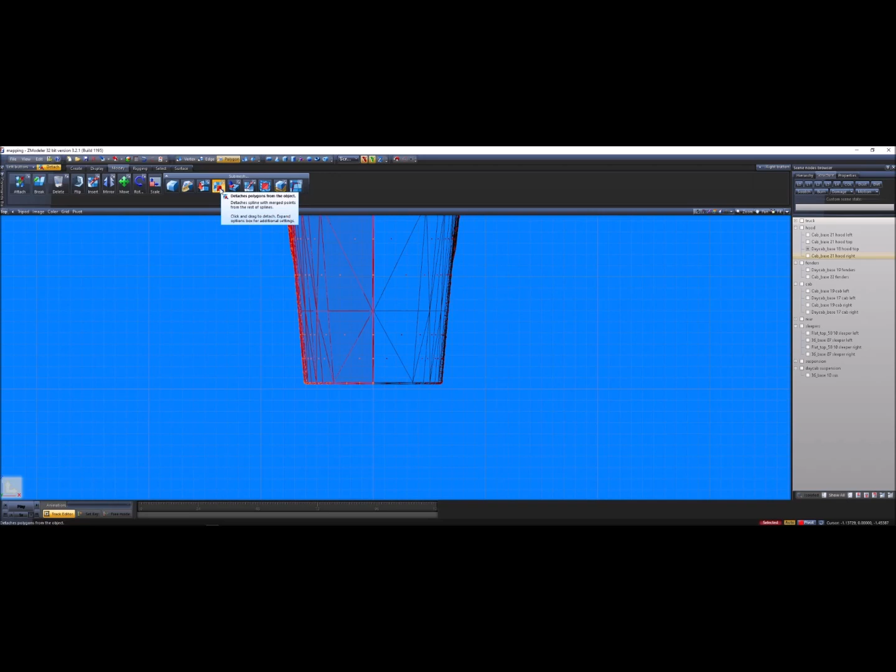Thanks. Go ahead and click it, then select the top half. Alright, there we go. Make sure under submesh you do this, it detaches polygons from the object. Click that, activate it, click your polygons, and that separates it.

So now that's how you do the left and the right. But what we also need to do is get the top separated. So what we'll do now is go here, select them both, polygon mode also.

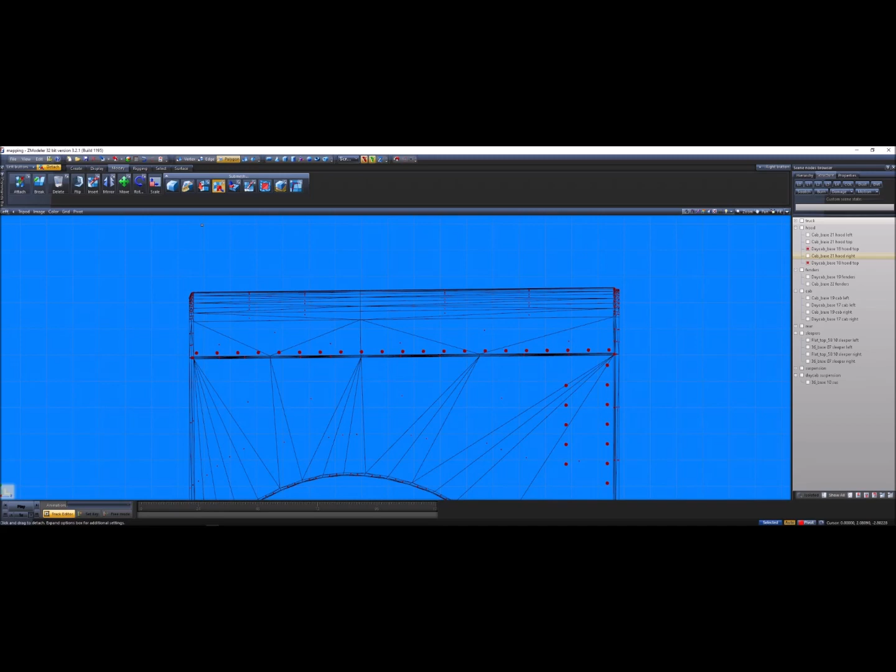An easy way to do it actually, let me show you. You can go up here, go to select, and click separated. This doesn't always work, but usually if it's a set of polys, it'll select them all. All you have to do is right click, and there you go.

We'll go ahead and see what that did. So I hit the detach button, and you can see that's done the top part of it. That should be good enough, so I'll go back to the top. We need to get these also.

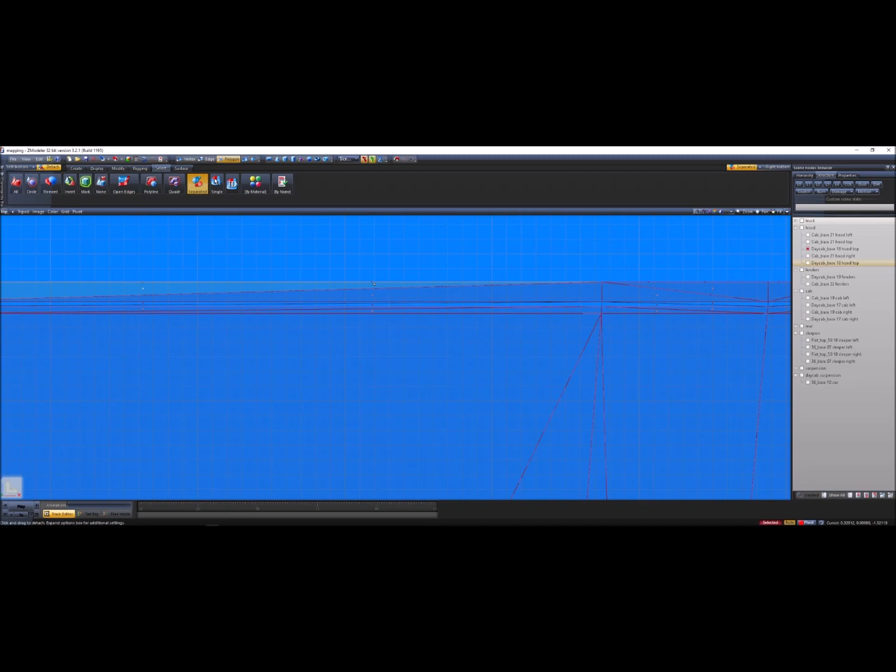Let's go ahead and right click and see what all it does. You've seen it misses some of them, so I just have to go through and select them.

So now that you have this selected, go ahead and go back and detach them. So the top part on the left side's done. Now we gotta do the right.

Alrighty, now it's detached also. So there we go, that's what we basically wanted to achieve right there, is everything separated. So now that we have these two top pieces, rather than messing around with them trying to get them all mapped at the same time, we're just going to go ahead and attach these two together. And boom, that is how we get the top, and that's how we get the hood separated.

And you can see I did that with all of them. I went ahead and just kept the fenders as is, because it makes it easier to paint them a color rather than attach to the hood. You can separate them, put them in its own box, and it makes it a lot easier.

See on the cab, I've also separated it. I didn't do the top on this one because you can't really see the top. In the interior view you can see the hood, so if the metallic flake is all messed up, it's really noticeable. But the roof, you're really not going to see it.

So yeah, you can see right there, I've went ahead and separated everything. And with the sleepers, I've also detached the back, so that it makes it easier to do the wraparound paint, and if I want to do a custom logo or whatever, it'll make it a lot easier.

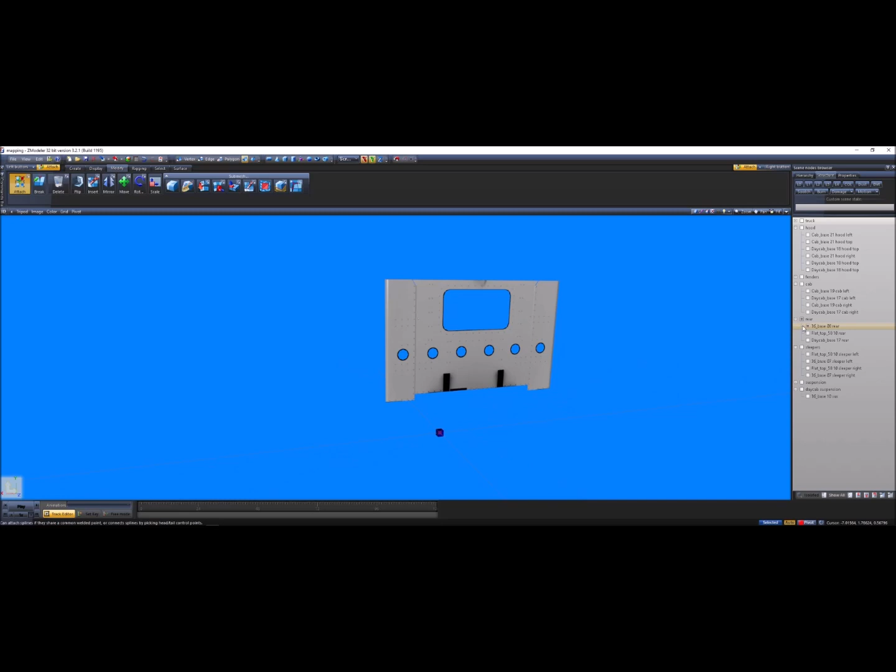So now that I've got that all separated, we'll go ahead and start mapping it. Typically, any truck you do, you want to do all of it at the same time, because it'll make it a lot harder if you've mapped one already, and then you're going to go back and try to map it with the other one. If those stripes are off by even a tiny bit, like say you're doing a stripe paint job, or any paint job really, if it's a little bit different, you'll definitely notice it.

So the problem with Zmodeler is in UV mapping, it does not like to have multiple things, unfortunately. So it's going to take quite a bit. It took me, I don't know, 20-30 minutes trying to get this truck because it's very high poly. And even if you have a good computer, it may still be hard on the program just because of the program itself, not because of your computer.

So now we'll go ahead and activate everything. What we'll want to do is go ahead and left click it. We'll do one sleeper just to make it easier.

Go ahead and get rid of the day cab. We'll do the 36-inch.

So now we got the 36-inch all done up. We'll go ahead and select it all, go to surface, and then go to edit UV. Go ahead and do that, and we'll click it, and you'll see this.

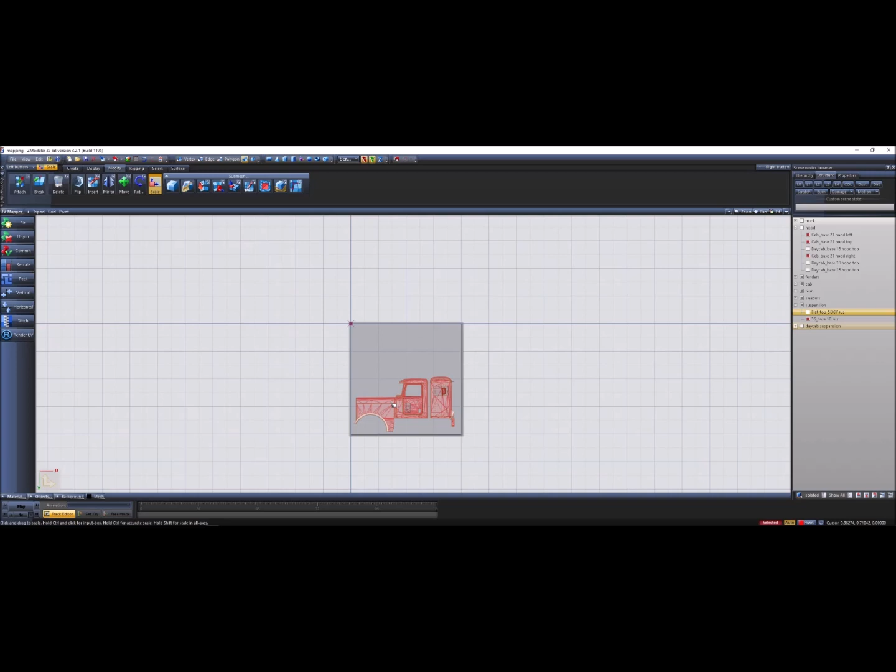We'll try to scale this down a little bit because we got to make room for the day cab, the back of the sleeper. So we'll scale it down about, let's try 60%. That should be good enough.

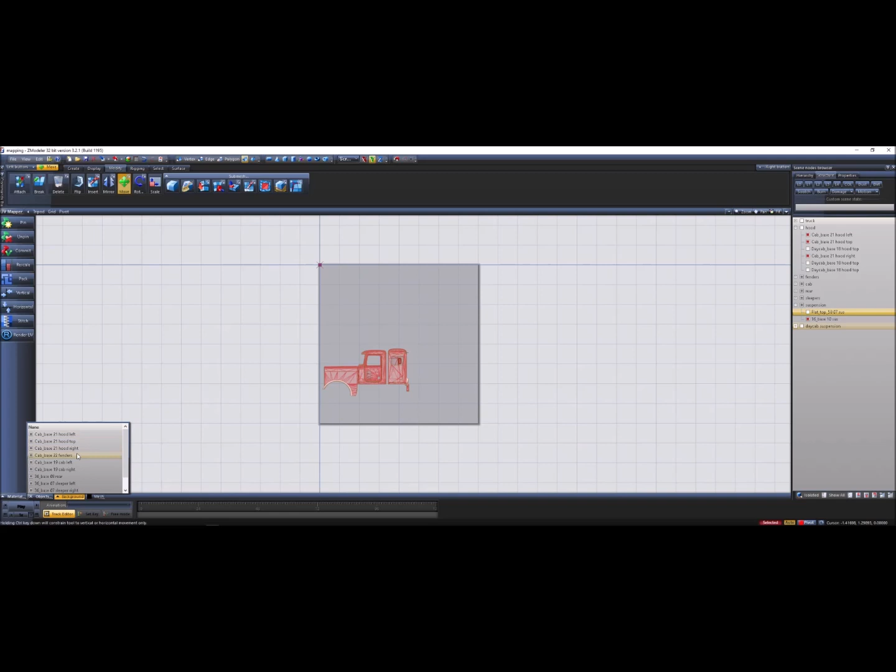Now before we get any further, I'm going to check to make sure that the rear has transferred over properly, or else we'll just have to restart. So we'll deactivate all of them except for the rear. Go ahead and select it. We'll rotate it.

Okay, so sometimes it won't go into UV mapping properly, and if it doesn't, you'll want to check your rear and left and right, because if they don't, sometimes they'll show up as a flat plane no matter which way you rotate it, and you won't be able to map it properly.

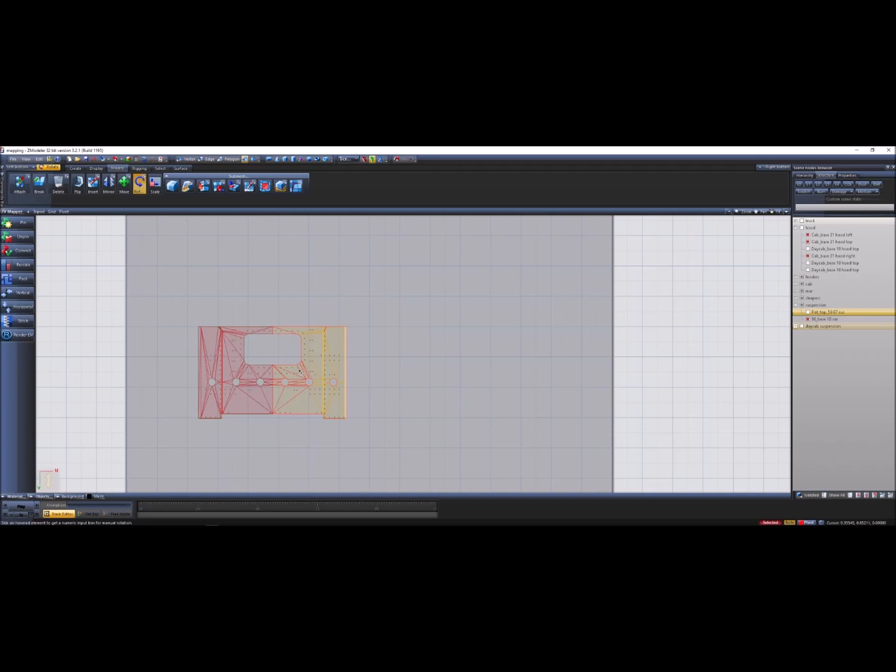So now that we checked to make sure that was mapped properly, we'll go ahead and activate it all again. Got it scaled down, we'll move this down a little bit. Alrighty, and there we go.

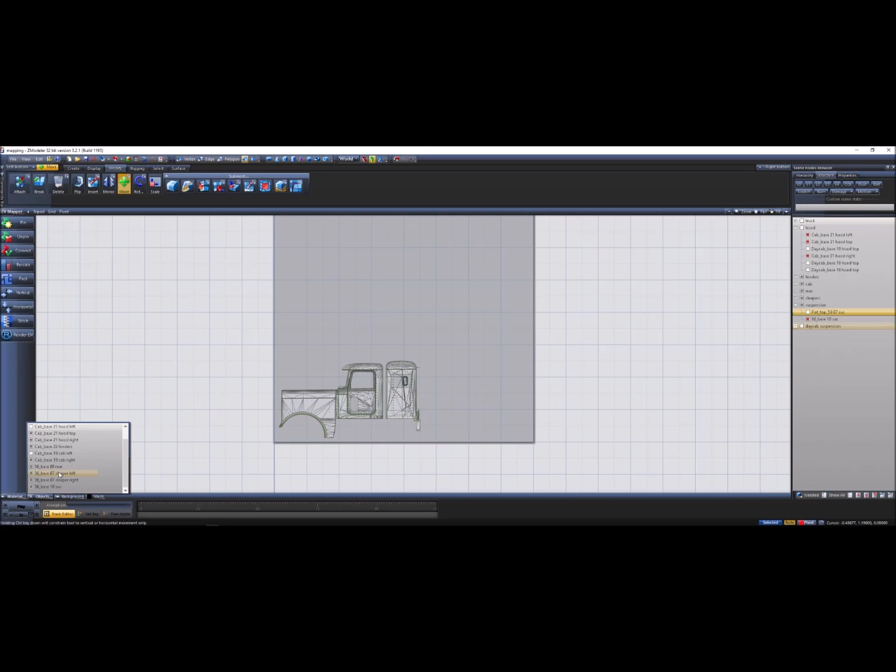So now what I'm going to do is deactivate the left side, because this will be where we're leaving the left side, and we need to move everything else. So I'll get rid of the suspension and the rear. Basically what we're going to activate right now is the right side. Get rid of all that. And now the right side is activated.

So we'll go ahead and select it all. I'm going to rotate it, and the axis you want to use is the x-axis, if I remember correctly. We'll go ahead and do 180. Hold shift when you click the object and this will pop up and let you do specific results. So we'll zoom out of here, and there we go, so it's rotated.

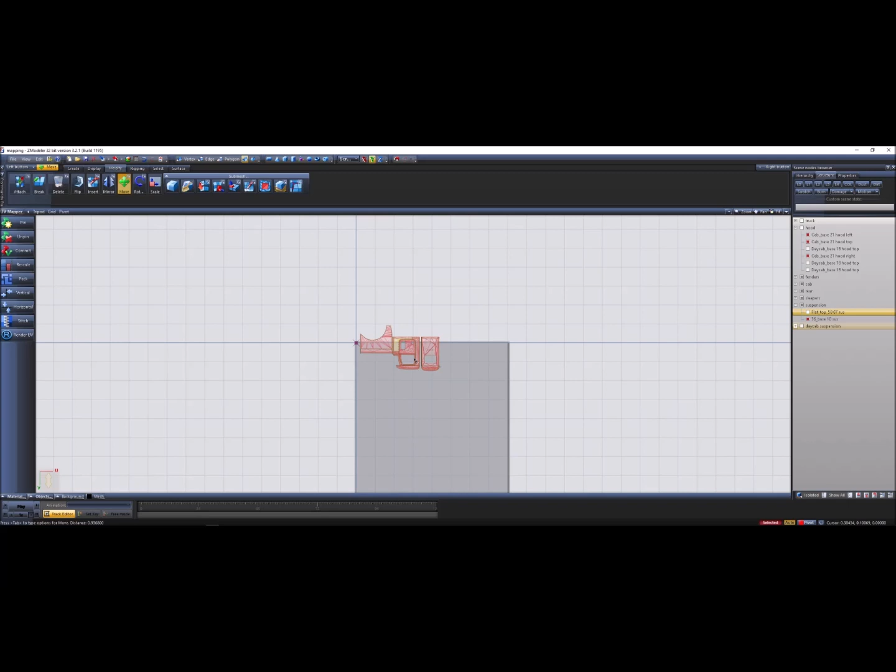So now it's rotated, and you can eyeball it to try to get it to be the same spot as the other one. For when you're doing paint jobs, you can just mirror it. So you can see about the length of it right there. We'll do that too.

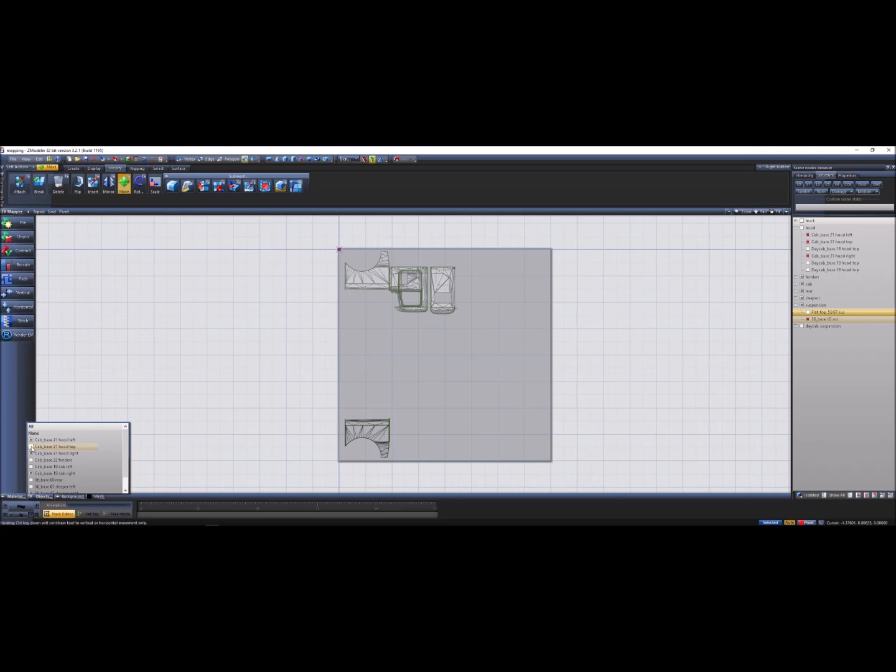Alrighty, so now we got the right side up there. We'll go ahead and do the top. We'll activate it to the left side just so we can see where between we need to put it. Keep that, we'll keep that.

There's the hood, and we'll go ahead and do the fenders also. Now before you select these, make sure you deactivate the left side just so you don't select any of the polys.

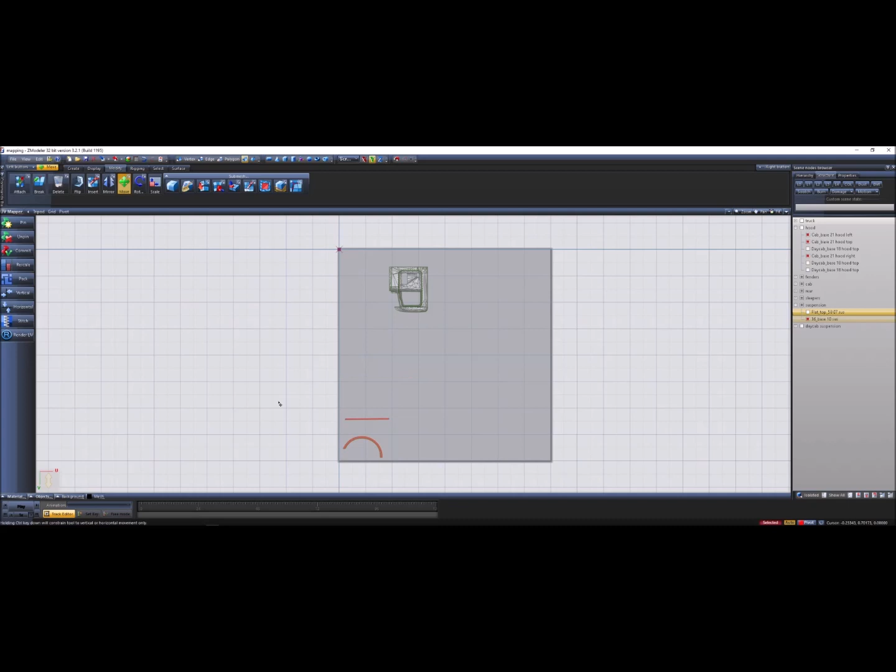Alright, now we'll rotate this. We'll do the same, we'll rotate on the x-axis, but this time we're only going to do 90. Oh, selected the wrong part. Let's see if I can get that selected again.

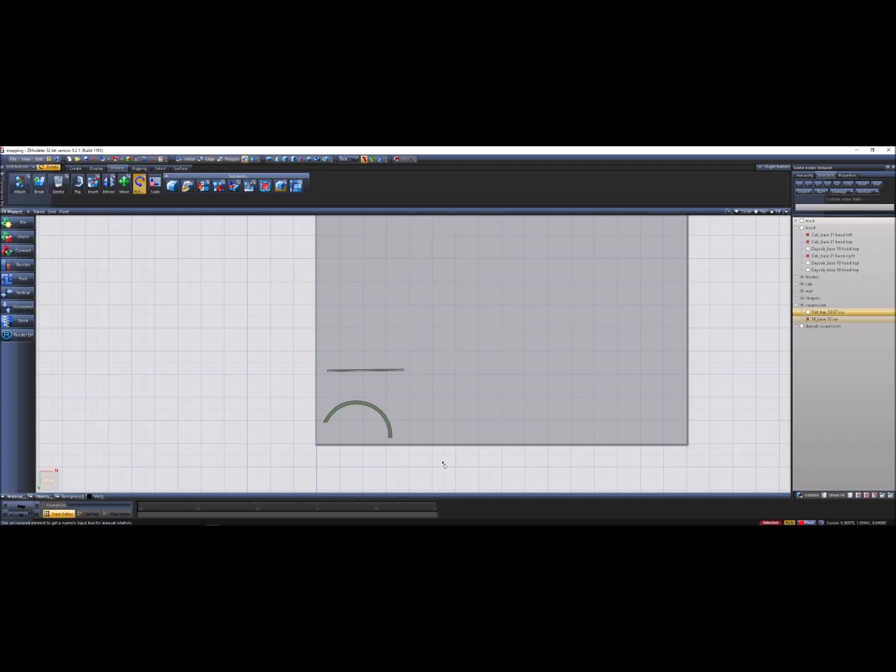It is not wanting to play nice. There we go, alright, 90. You'll see rather than rotating it fully, it has only rotated 90 degrees to where we can see the top of it. We'll go ahead and move this down.

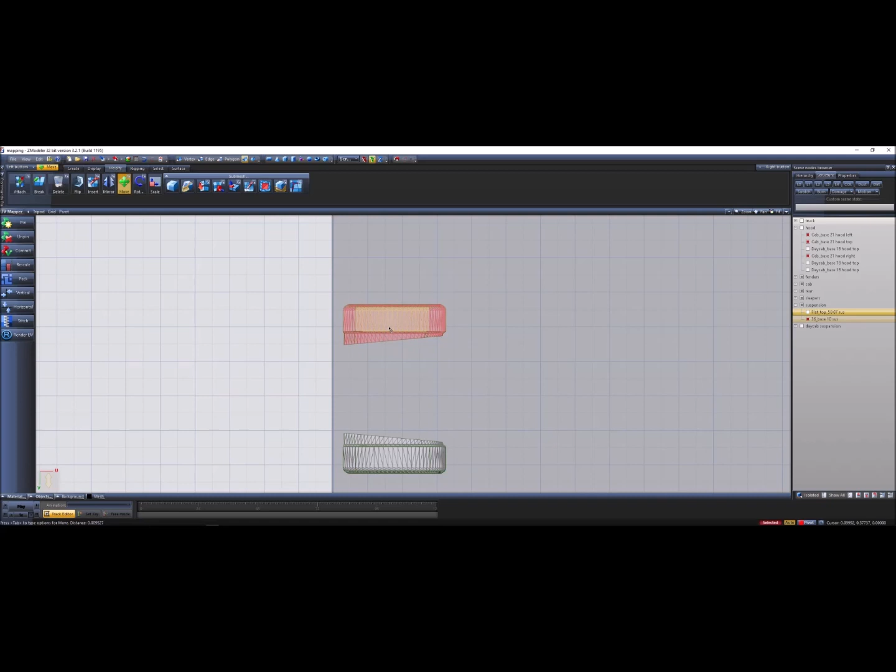Activate everything so I can see where to put it. Doesn't have to be perfect, but there we go. Now I'll go ahead and deactivate all of it, and we'll activate the fenders again, because I want them to be a little bit separate from the hood so it makes it easier to paint. So I'll go ahead and move it about 10. I'll do the same for this one. If you want to pop that up as you're moving it, just hit tab. We'll go back, check the hood, and there you go, separated.

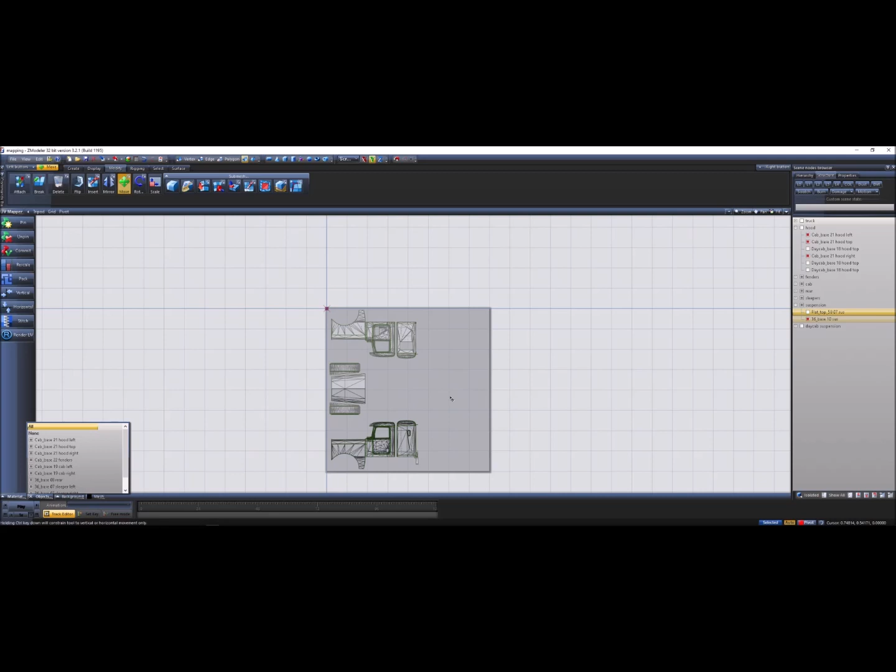So now I got the left, the right side done, and the hood and fenders done. We'll go ahead and work on the back side and the suspension. So we'll deactivate all of this.

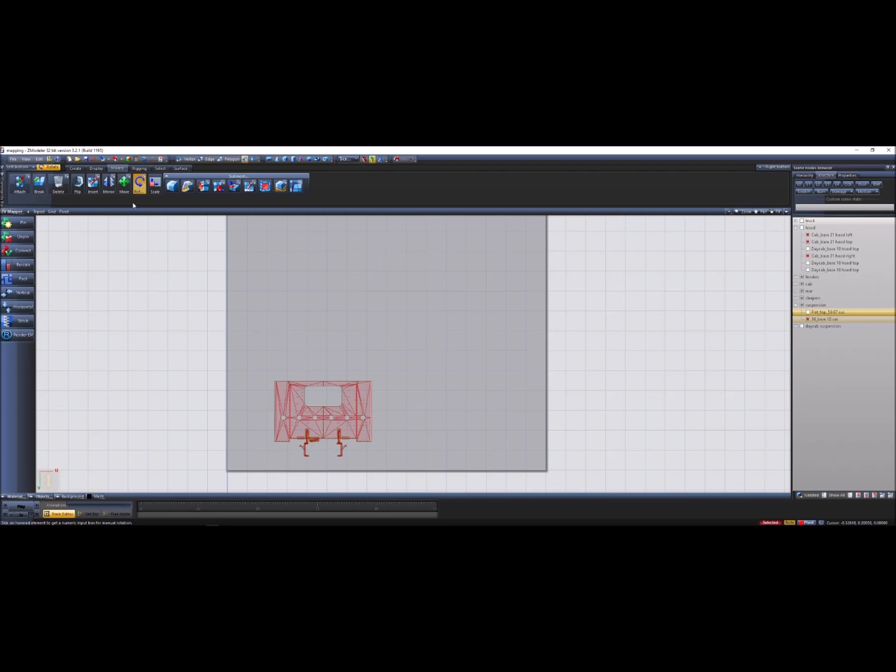Go ahead and outline this, and we're going to rotate it. On the y-axis, we'll do 90 degrees also. Go ahead and move that to the left. And you want to make sure it's facing the right way.

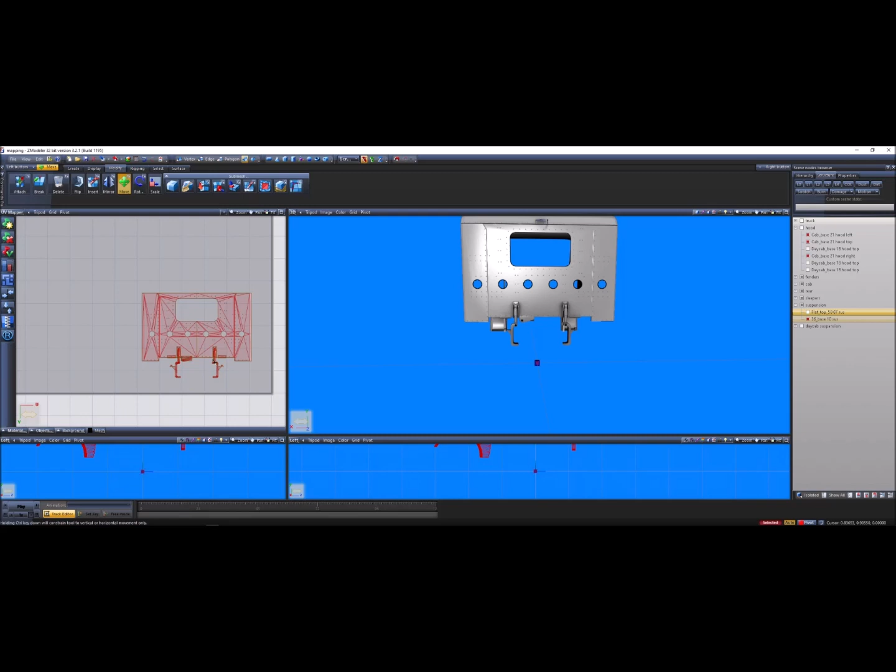If I look at this, you can see this portion right here matches this. You don't want it to be on this side or whatever, because it'll be mirrored if you're doing anything like text or whatever. If you're doing stripes or whatever, it's not going to matter, but if you want it to be specific, make sure you're mapping it correctly. You don't want to rotate it negative 90 degrees or anything like that. You want to make sure you do positive.

So we'll go ahead and activate all this, make sure it's all lined up. And it looks good.

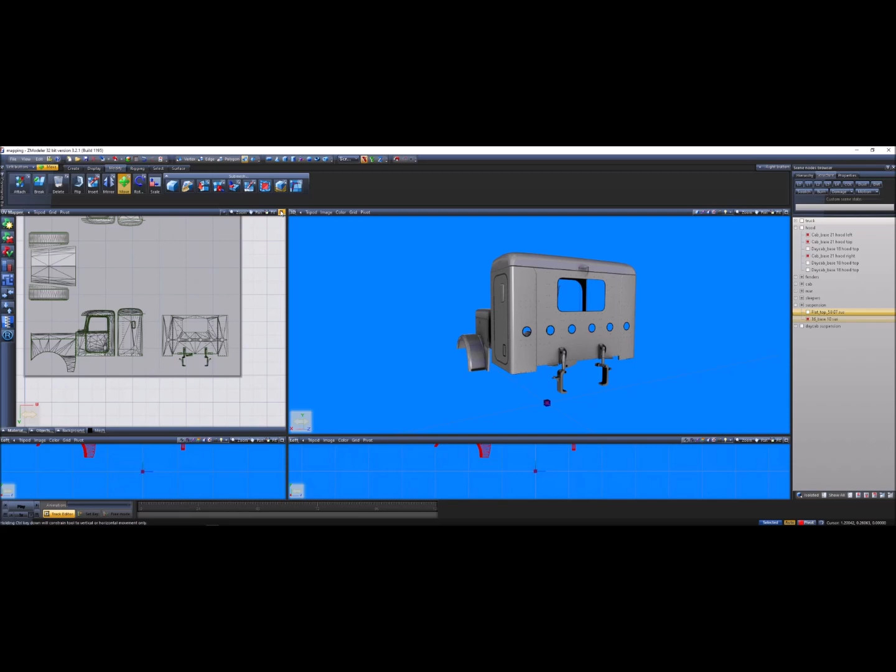Now say you're wanting to map a part to a template that's already been made. Well, what you do is you go up here. We mapped it to the UV glass, so I'll go back to the UV mapping real quick. It's probably disappeared. It did. Okay, alright, so say this hood, it's not mapped yet, but I already have the cab mapped.

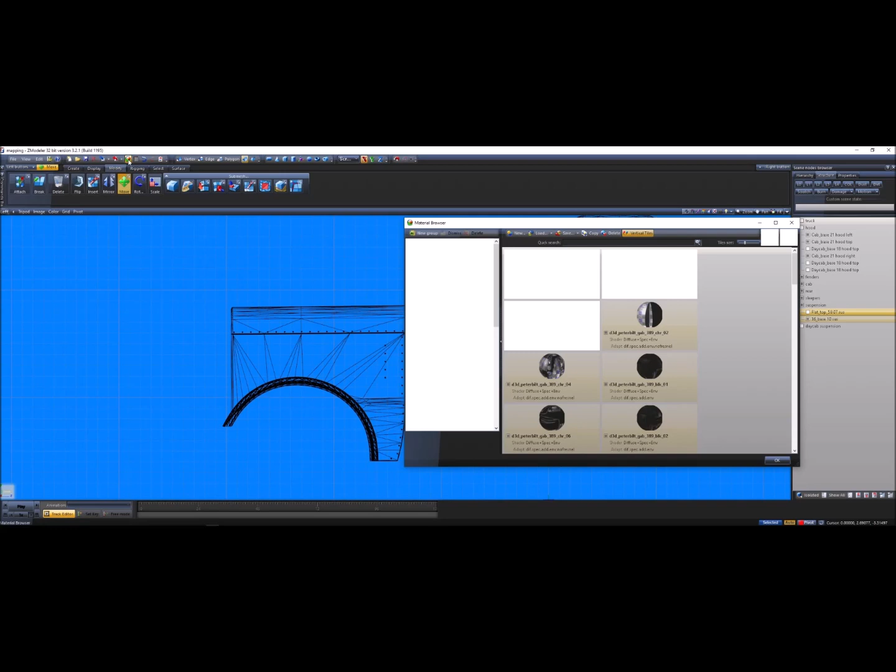Well, what I want to do is find out which one's mapped to, or find the material that I'm going to assign it to. This is only temporary, so go ahead and go to Material Properties. Let's do this - if I go to Properties, you can see right here, multiple materials. So we'll go ahead and select just the fenders and see where it's mapped to. So it's mapped to the AO4.

So what I'm going to do in here is go here and type AO, do the 4 just to find it. See if we can find it. So there we go, it's right there.

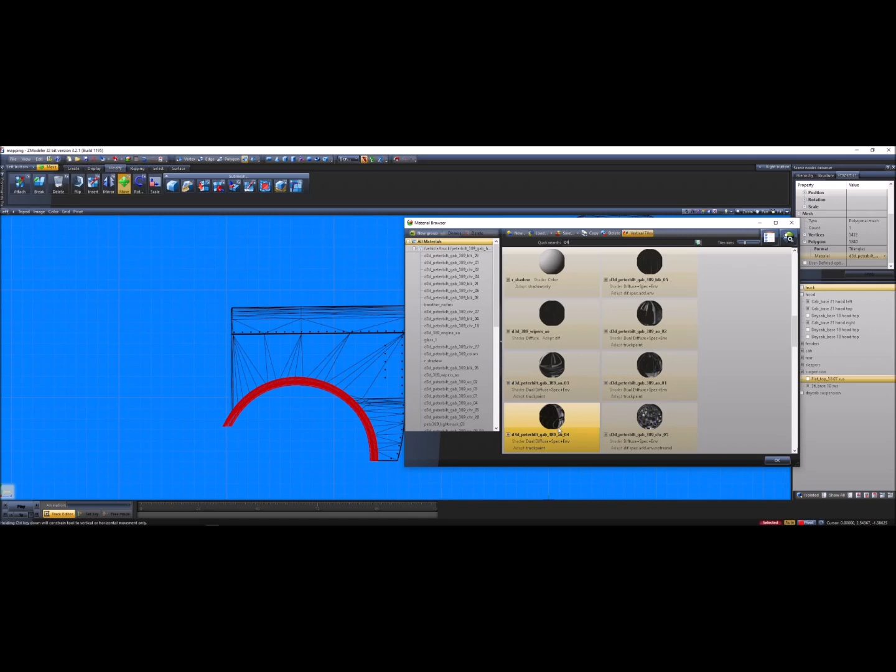Like I mentioned before, the way it's set up is usually empty DDS. If you want to figure out where to map your skins and templates to, you just go into here, go into wherever the truck paint's at, and go to Detail 2, or wherever your empty DDS may be. This is how you figure out what you're going to map to. Sometimes people put this to UV channel 2 - that's the old way of doing it. If it's updated to the newer game, it'll be UV channel 3. So you want to go here, click Detail 2, look where this is at. That's where you need to map to.

Anyways, you want to go to Texture Map. If you want to map to a template that's already been made, click that. And I'm going to click Add, and you can see everything right here - these are the templates. So I'll go ahead and select 36. And there we go, I've added that to it.

Remember what you were using prior to doing this - like I said, this empty was attached to this one. So make sure after you're done, you put it back, or else it's going to export incorrectly. So I've done that. Now I'm going to go back here. We'll go ahead and select all of this, because I want to map it to this. Click Edit UV, we'll go ahead and click this.

And we can generate new, so I'm going to force it onto wherever I've attached that to. So we did this one right. There we go. So AO4, I'm going to force it to that, and make sure it's the same channel. Generate new, click that, now we'll go check it out. And you'll see, this is a template I've already made for the truck. I've already mapped it, but this is what the template will look like.

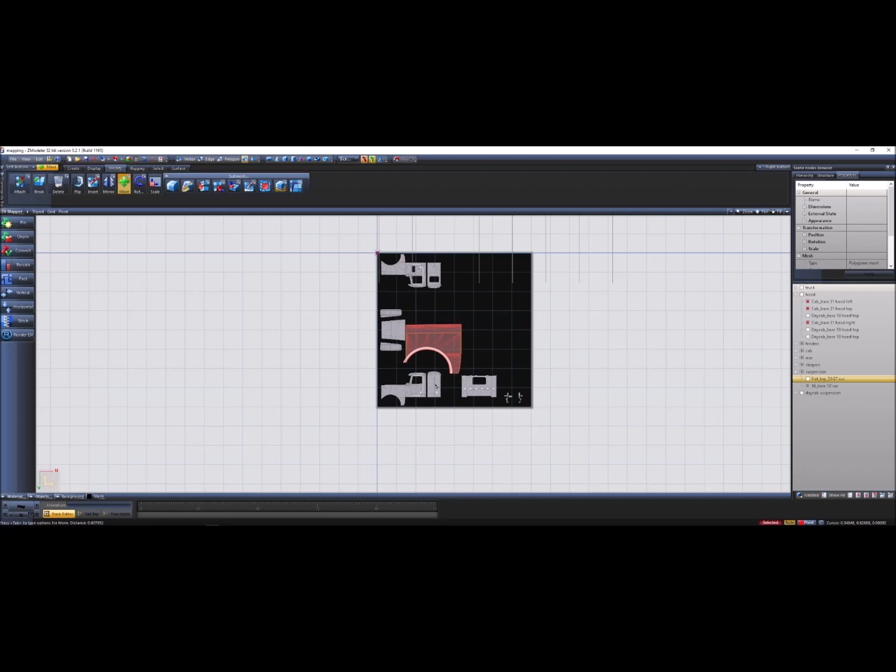So say I want to try to get it to this. The way I usually do it is I'll move it down there, get it to about the same size. This would be easy to do, but say the hood wasn't there already. You're going to move it down there, get a rough idea. If you can use two views and look at it, you can compare where it all hooks up, compare the sizing, and that'll help you get it lined up perfectly. So obviously it's not lined up right now.

Say I can't do that, it's getting too complicated to where it's not fitting properly. Well, you can do something else - instead of using the template, I can use a paint job, which will help a lot with lining up stripes and stuff. So I'll go ahead and go in here, and we'll use this one. I already had it assigned, but I might as well show you just so you know. So now that that's up, we'll go back here.

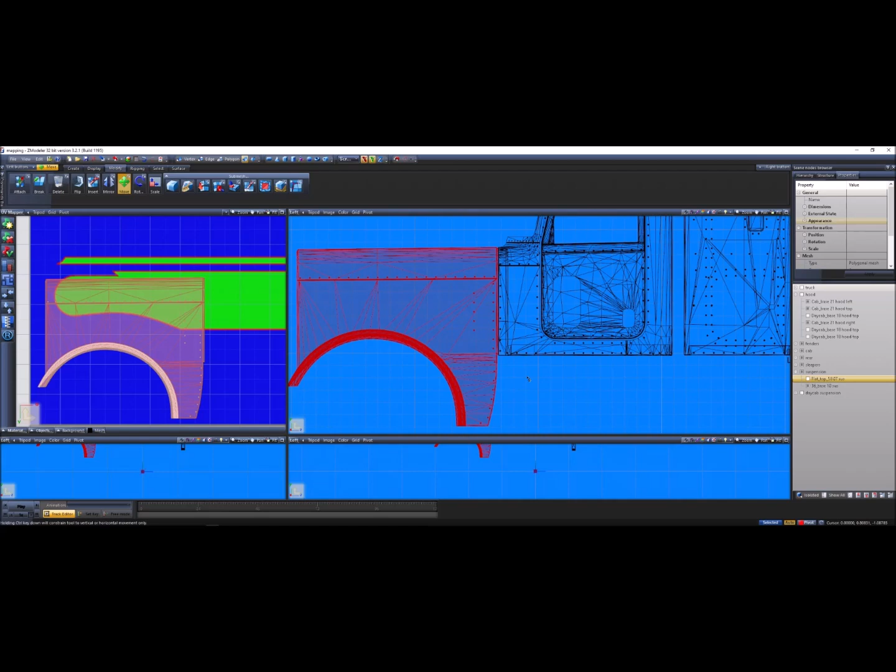If you need to, it can be a pain. So if you're going to do UV mapping, typically save your project beforehand, so that if you need to, you can take just the cab and hood and all that stuff itself, detach it, export it, and then reattach it to your old file, because sometimes you'll mess up the materials and stuff doing this. So as you can see, even though I have it assigned to that, all of this stuff is assigned to its own thing, so I can't really tell where the stripe's going to line up to be.

So what I want to do is select all of these, go here, and assign it. Now this is the fun part, because you can't see the material - I need to move it over. There we go. No, right, you can't still see it though. And that's the problem with this. So we'll go ahead and figure out where this is located.

So what I'm going to do is select this since it's already assigned to it, and see where it's showing it right there - the Bub Pete 389 glass mask. There we go. Alright, so we'll attempt to get to that one. Where was that at? Right there. So we'll try this one and see. Might not be it. Maybe not. Nope, okay, so we'll go down again. Possibly, yeah. It does not want to play nice today. See, maybe it is all. Nope, it's not - still not assigned to it. Okay.

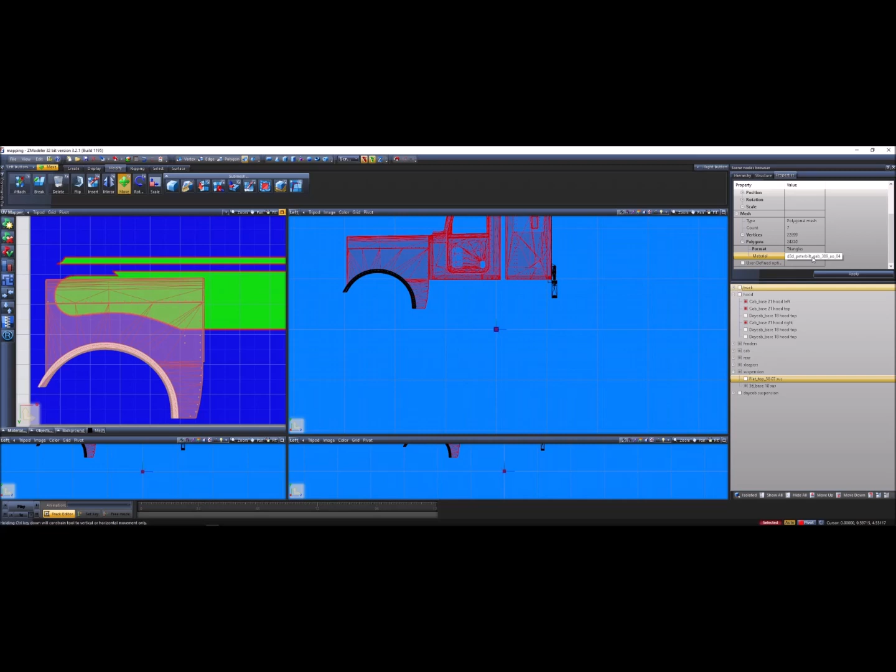Oh, there we go, and you can see that that's affected. So what I'm going to do is disable the AO real quick, and you can look at it. Make sure you keep the name. You typically won't run into this error - usually if people AO bake something, they use the AO bake on all of it, and it just so happens that this truck has everything separated. So go ahead and click that off just so it's not showing this weirdness on it. There we go, so you can see now I can see the paint job.

Alright, so after that, we're going to go ahead and click this out so I can see what size to do. What we'll do is scale it down. And you can see as I'm scaling, it makes it bigger, so we want to make it smaller, so we're going to scale it down a little bit. I usually only use this method if this truck didn't already come with a template, which it's not hard to make a template at all. But if I can't get it just right and I want to make sure it's perfect, then I'll go ahead and use this method.

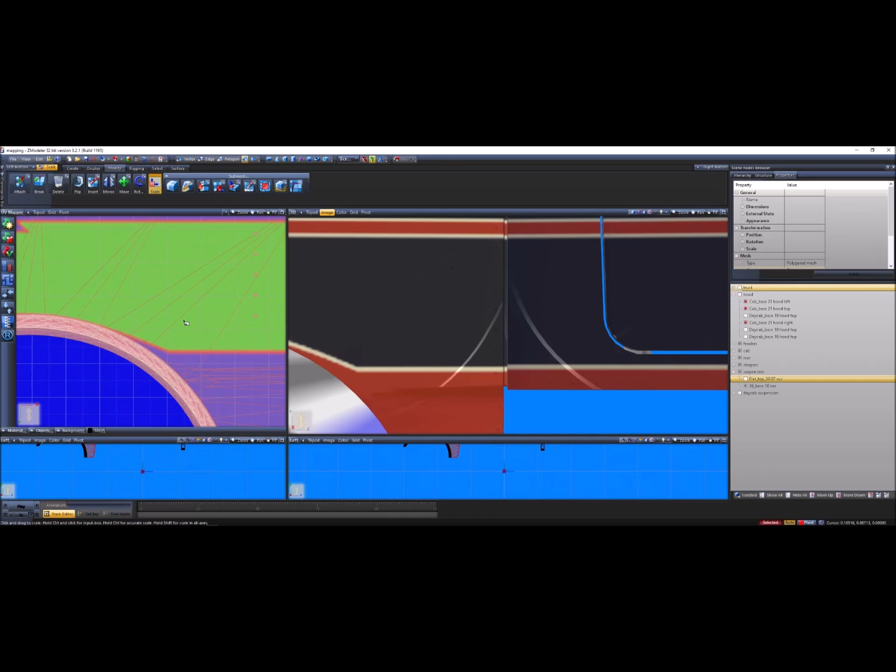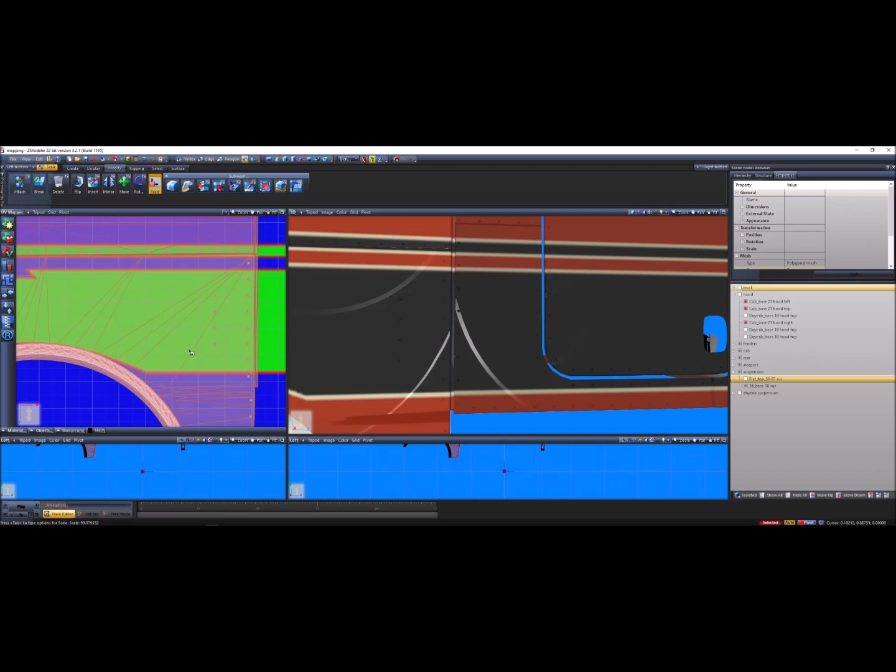So you can see that's a little bit off, so what I'll do is go to the top and click X, which puts this right here, and that's where it's going to scale it from. So go ahead and do this a little bit - just a hair. You can zoom in and it'll do it really slowly, which makes it easier to get more precise results. And there you go - that does look a little bit off too, so we'll go ahead and move that down. It's just basically guessing, and it'll probably mess that up a little bit, so it's just working back and forth basically. And that's good enough - so now we have it mapped, and then we're good to go.

I'll go ahead and show you how to make a template also. So say I already have everything mapped, I'll go ahead and open it - open up the old one.

So I want to make sure, say I'm doing the day cab. Well, first off, I'm going to select all the day cab parts. Go do this, make sure you got everything activated.

And I'll select it, go here. And instead of hitting generate new, make sure you hit keep old mapping. And then we'll force it to any of these, it doesn't matter what it is, but we'll force it.

Go ahead and do this. Click keep old mapping, we'll try again, see what happens. There we go. Alright, you can see, I'll outline it here since the color - you can see everything's already mapped. So what we'll do is, after you've done that, got it all set up, you'll click this button right here, Render UV.

So say I've already got the hood, we'll do the hood this time. We'll edit UV, go here, keep old mapping. It is just not cooperating today.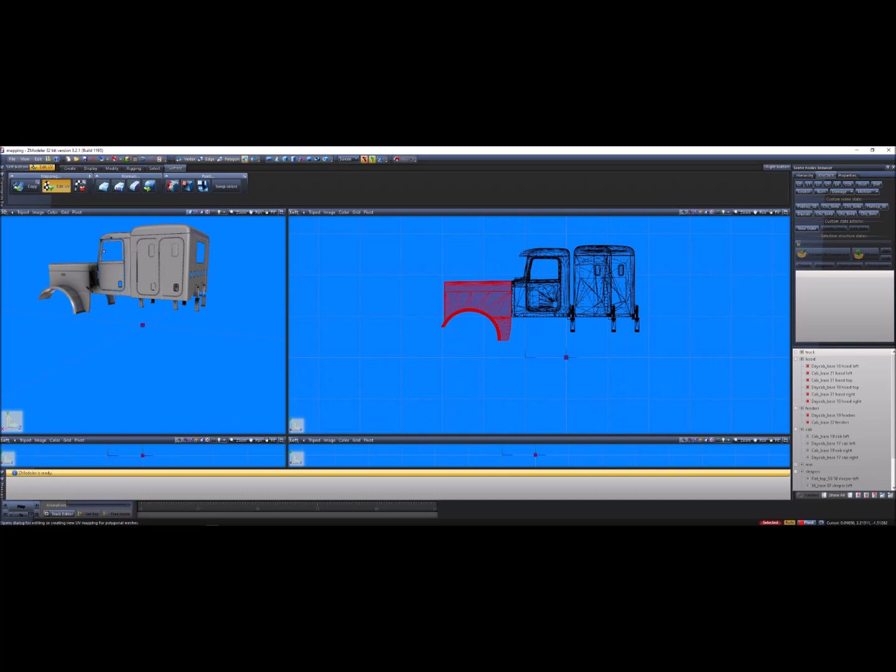There we go, try this again. Click Render UV. Make sure you have it set to wireframe UV - that's how you get your template.

So I'll zoom out, you can select the size right here. I typically do smaller one - if you do higher, just like just now, it'll try to crash ZModeler. This program is good for modding, not so good for anything else.

So go ahead and click render right there, and boom, it creates your template. And then we'll try it again, see if it does it. Day cab.

Alright, so put everything on there. We'll try this again, and you can select whatever texture you want to on the background. Typically I do a color that is very contrasting to the white, just so if I delete it, it's not going to delete the template itself.

Let's go ahead and click render. There you go, you click save. You can save it as a BMP or a DDS - I usually save it as a DDS, so we'll try the test DDS.

And there you go. So if I go back here and select this, and I'll do, let's just say, pick a random one. We'll click add and go back to the main screen. There's the test DDS - you can see it's red from where I selected the color, and it has the truck right there.

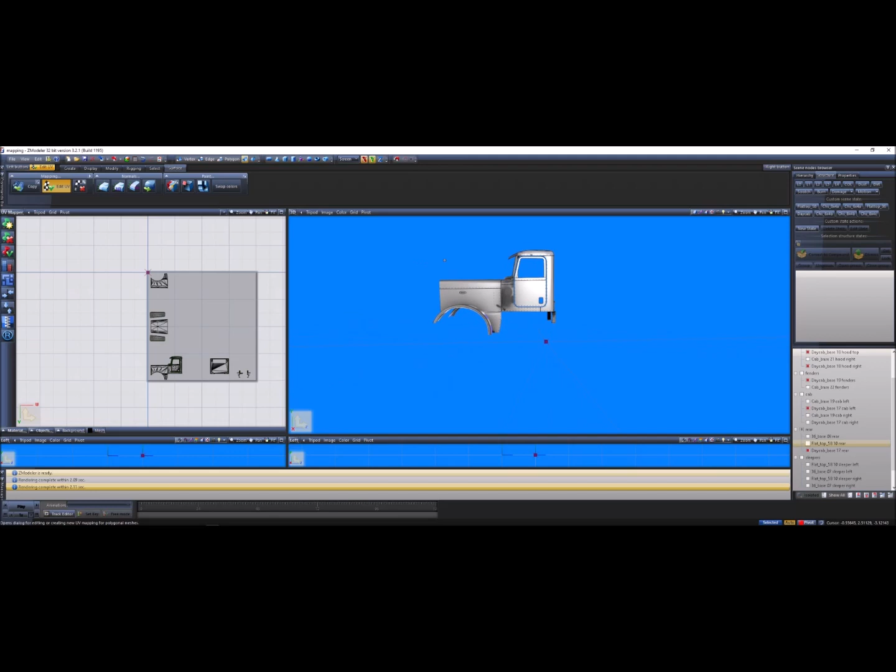And that's pretty much how you do it. I mean, I may have missed a step or two - if you watch the video back, you'll see some stuff, but I think it did pretty good on the basics. It's not too hard, it's just when you hear UV mapping, it sounds bad, but it's not really that bad. It's easy, and once you learn it, it opens up your world a lot, because this will allow you to add new parts, will allow you to create new parts, and you can do bump mapping and all that stuff, which is a whole other subject of its own, and I'm not going to go over that today.

But that's the basics of how to do UV mapping, how to make a template, and how to, if you don't really have a template and you want to try to line things up, loading up the paint job itself and comparing that way is another good way to make sure you did it properly.